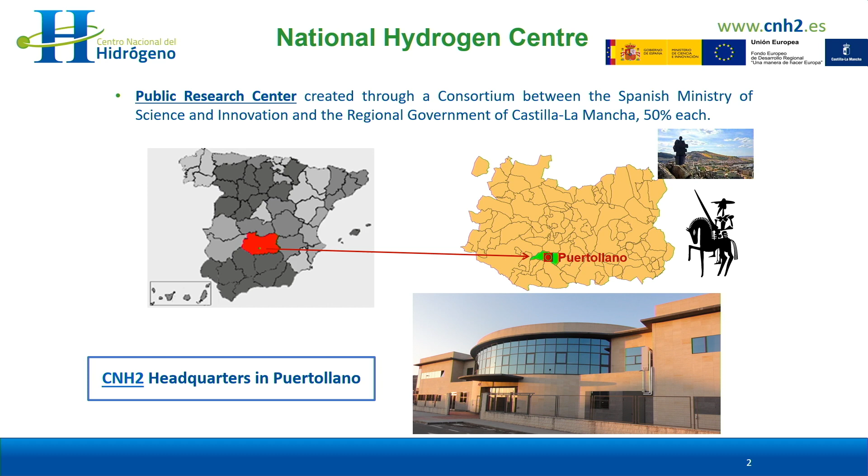Our headquarters are located in Puertollano, which is a city south of Madrid, like an hour by train. And Puertollano has a really important industrial history, and it is now becoming a core for the hydrogen world.

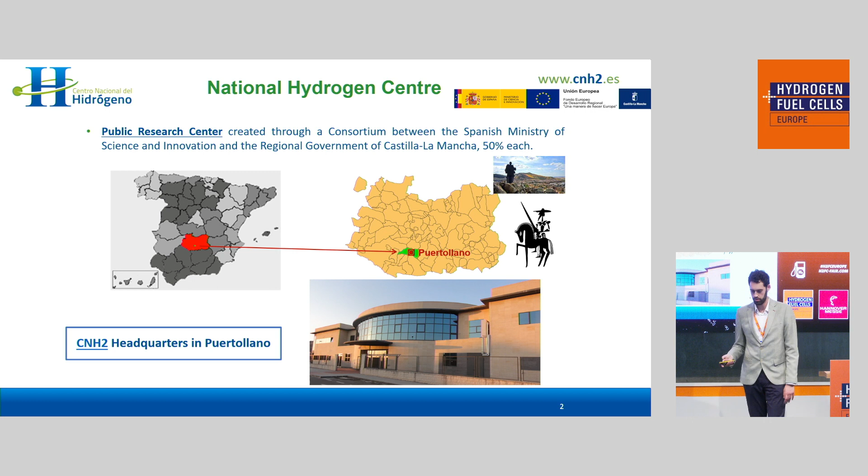We, as a research and development center, are focused on the development of hydrogen technologies, and our main objectives are the promotion and encouragement of hydrogen technologies, such as fuel cells. We perform research, experimentation, and validation of different prototypes and equipment. We can develop and scale different processes.

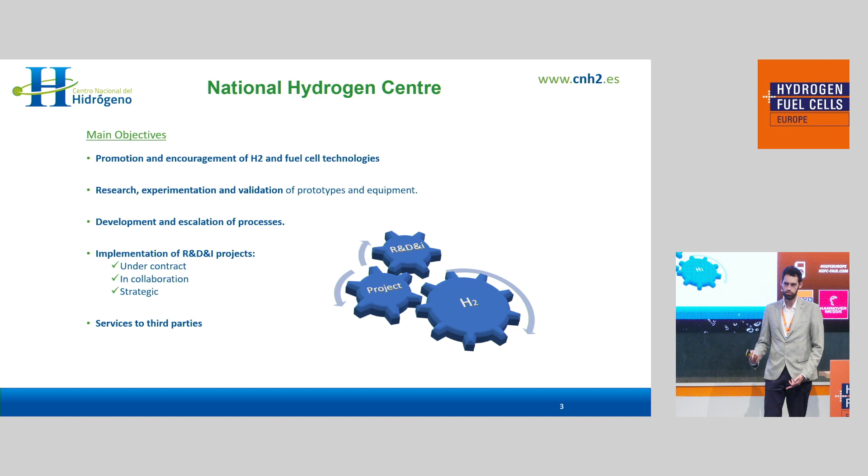And our way of working in research and development projects could be under contract with private or public funding, in collaboration with other companies, national or international, and strategic projects, meaning projects financed by our own resources. We can also provide services to third parties, such as training, consulting, engineering, testing, etc.

I want to talk a little bit about our main lines of work. About hydrogen production, we are focused on electrolysis technologies, specifically PEM, alkaline, and solid oxide, but we also have laboratories for biotechnologies. About the use of hydrogen, in fuel cells, we do all the stages: the design, optimization, manufacturing, assembly and testing. We have a microgrid laboratory for the integration of hydrogen with different types of energy.

In transport, we have experience with forklifts, bicycles, and especially medium and heavy duty vehicles. And of course, with hydrogen refueling stations and domestic hydrogen refueling points. In industry, we can talk about the use of reformers. Recently, we have a project about the construction of a biogas plant. And in buildings, we develop micro combined heat and power for domestic hot water or heating, for example.

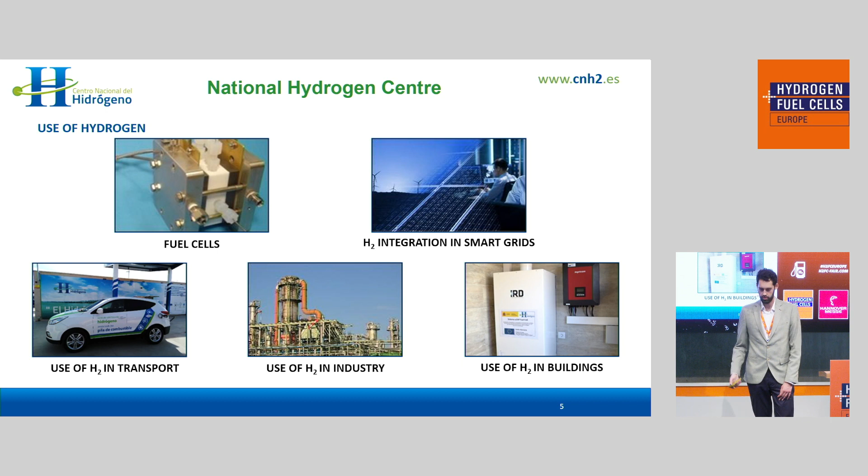We can test materials, coating materials in contact with hydrogen, hydrogen embrittlement. We are talking about blending simulation or the development of test benches for mixes, hydrogen purification, hydrogen storage in the form of compressed hydrogen. Also, we expect to have a liquid hydrogen laboratory really soon. And power to X in different forms, such as power to ammonia or power to gas.

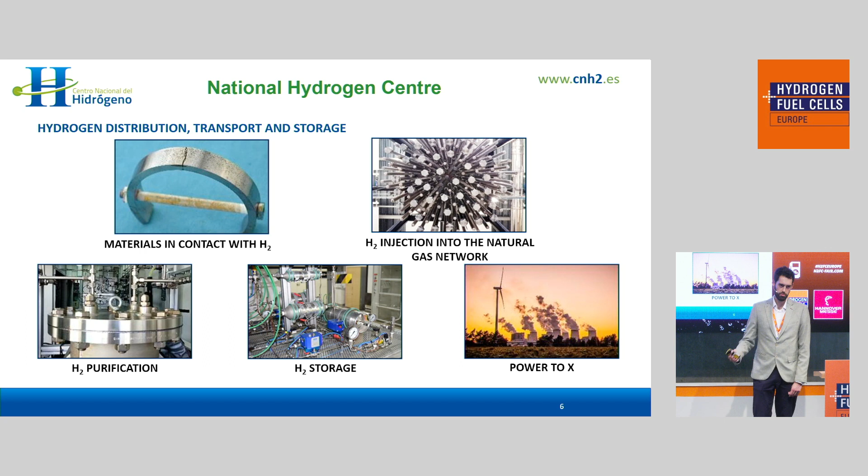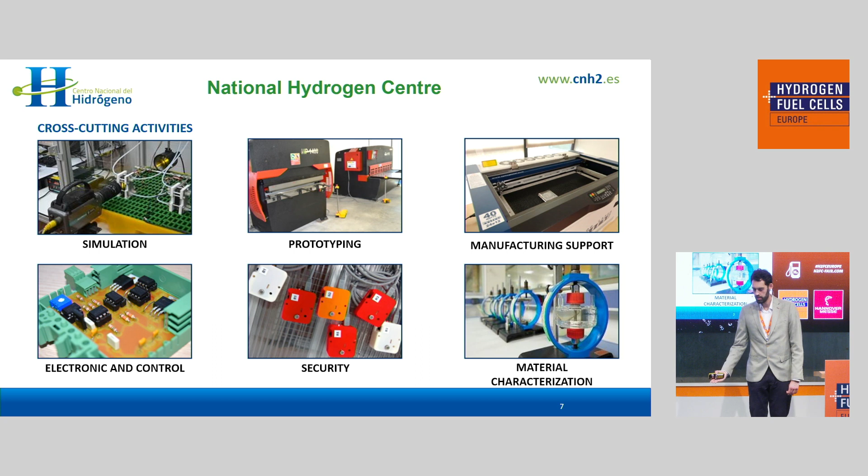And the activities that support all our lines of work could be simulation, prototyping, manufacturing support. We can develop our own control system and adapt it to the different needs, explosive atmospheres studies, material characterization, etc. As you can see, we can cover all the stages of the hydrogen value chain, from production, storage, the transformation, with our own balance of plant or with the final balance of plant, and the end use.

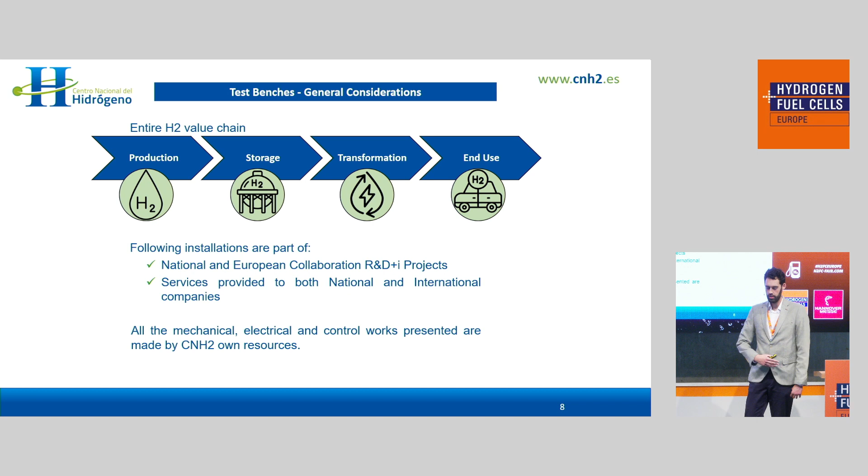In each and every one of these stages, we can carry out all the necessary tests, and that is what I would like to show you briefly here. All the installations that you are going to see are part of national or European collaboration projects, and also part of services provided to both national and international companies. And of course, all the mechanical, electrical, and control works are made by us, such as designing, calculation, drawings, connections, integration, etc.

We are going to cover the whole chain step by step, starting with the production of hydrogen. Here we have an alkaline electrolysis test bench. This one allows us to test powers up to 2 kilowatts and 35 bar, and it includes the cooling system.

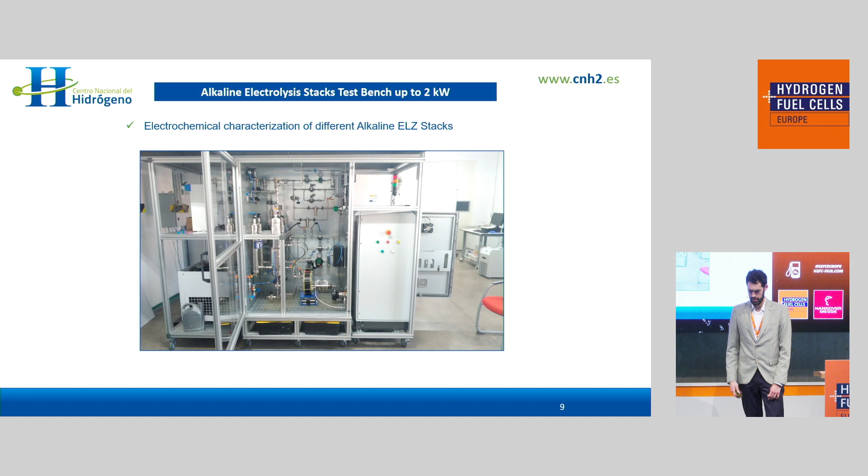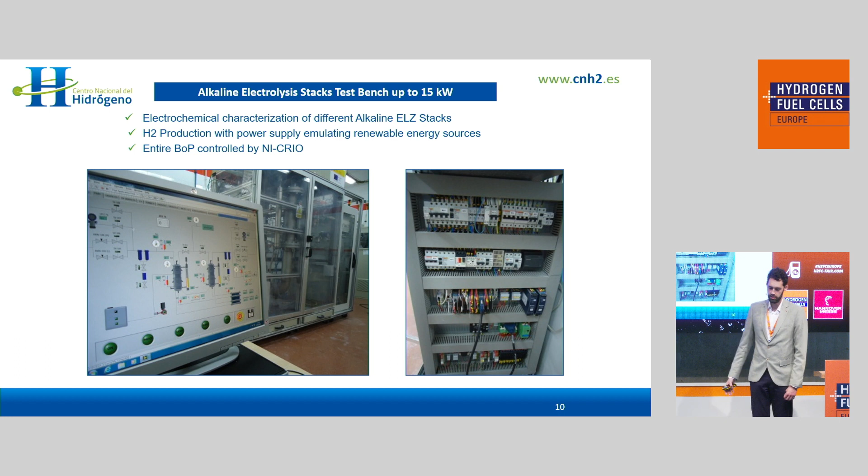This one is also alkaline, but allows us to test up to 15 kilowatts. This is one of the first that we built. And here we simulate a power supply from renewable energy sources. And in this case, the entire bench is controlled by CompactRIO systems.

About solid oxide, we have this project. We are trying to start a semi-industrial production line of solid oxide systems, both electrolyzers and fuel cells, of course. And we do all the stages from designing, optimization, manufacturing, and assembly, and of course the testing. In this case, we are testing up to 2 kilowatts.

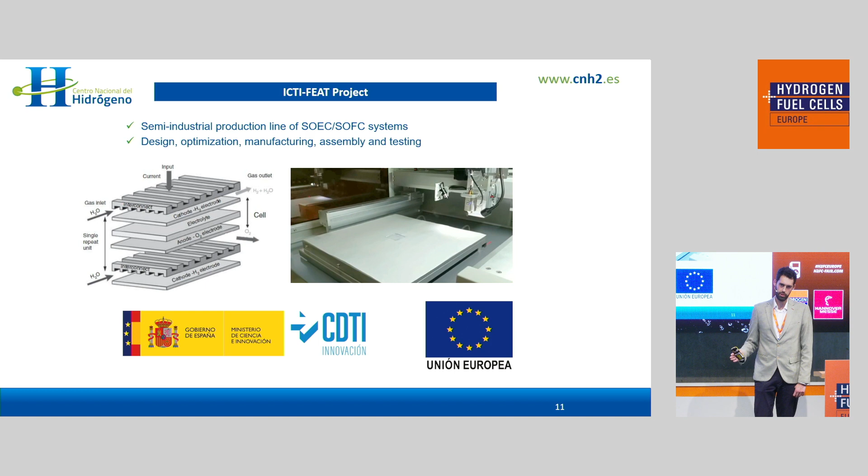About fuel cells, all the fuel cells that we have are PEM in this case. In this photo, you can see two test benches. On the left side, there is a test bench between 1 and 10 kilowatts, and on the right side, between 10 and 30 kilowatts. In this case, we can test stacks directly, and we have a great versatility because we can modify our configuration so it can adapt to the different needs.

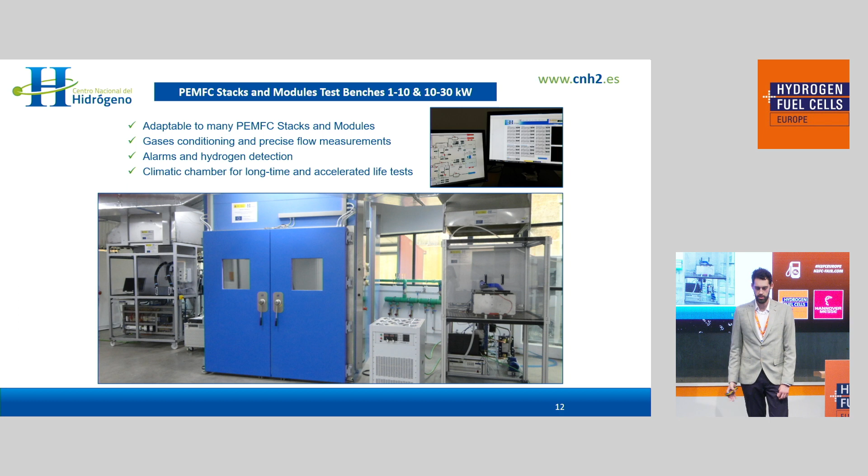In the middle of the photo, the structure with the blue doors, this is a climatic chamber that we use to test the behavior of our system under extreme conditions of temperature and humidity. So we can see the aging of our stacks.

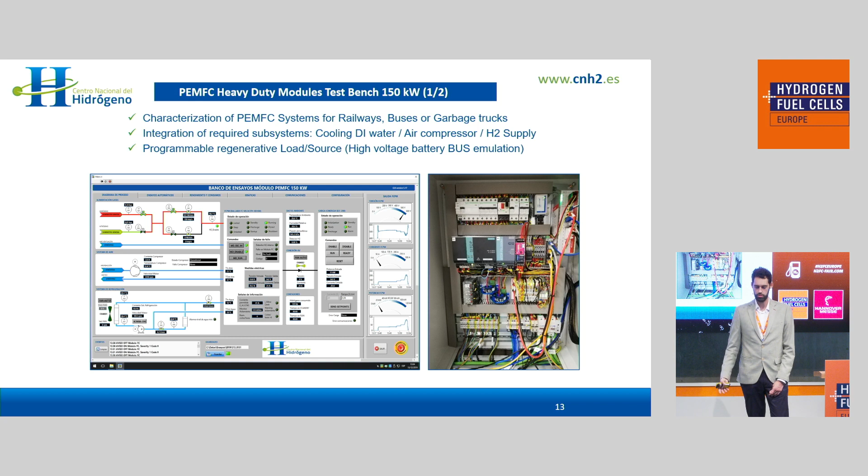We have a European project called FCH2 Rail. Here we are testing a fuel cell power pack that consists of 3 fuel cells of 70 kilowatts each. And here we test it together with the batteries and the AC-DC converter. These tests are not only for the fuel cell, but also for the hybridization of the system. And that means we can test how the system behaves when the batteries and the fuel cells are working simultaneously.

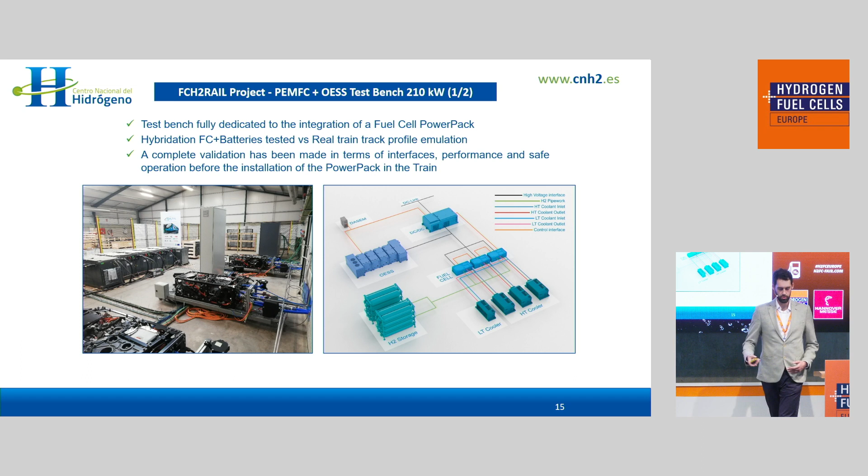This one is a test bench for a final use. We are developing prototypes of gensets for Nedstack fuel cells. They are an alternative to the diesel combustion gensets already in the market. And we have alternatives with AC, with DC. There have been several models developed.

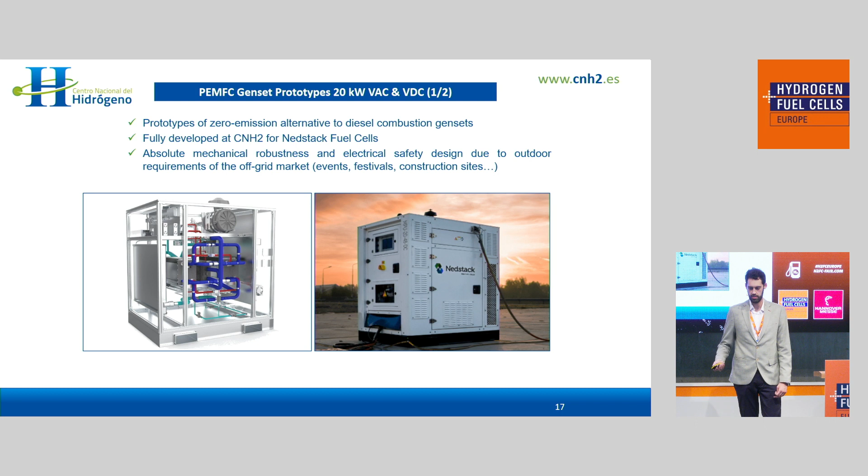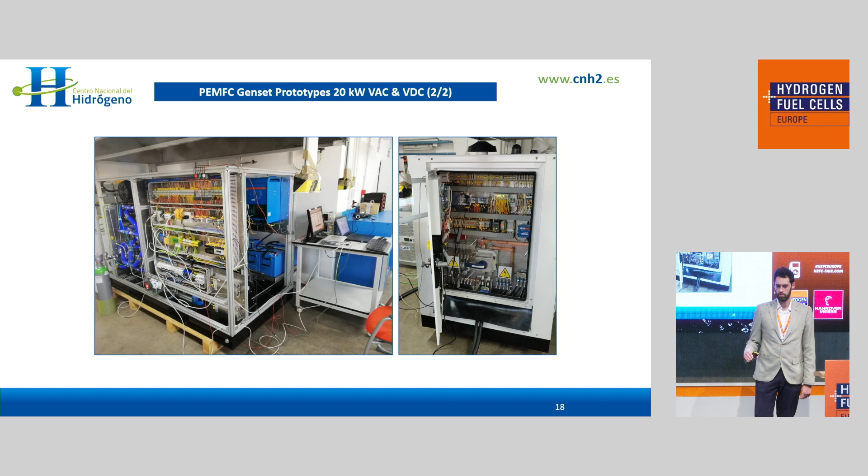In this case, it has a superior level of robustness above a prototype, because this one is a system that the company Nedstack is going to show in fairs, in events, etc. So these are photos of the different test benches that we are developing. And in this case, the genset goes up to 20 kilowatts.

And finally, we have the H2 logging project, where we have two parts. The first one is the retrofitting of a forklift with a 1.5 kilowatt fuel cell. And the second one is a development of a hydrogen range extender for a medium-duty vehicle. And in this case, the fuel cell has a power of 16 kilowatts, and all the different tests have been carried out, both outside of the vehicle, and of course in the vehicle, and the vehicle in our roller bench.

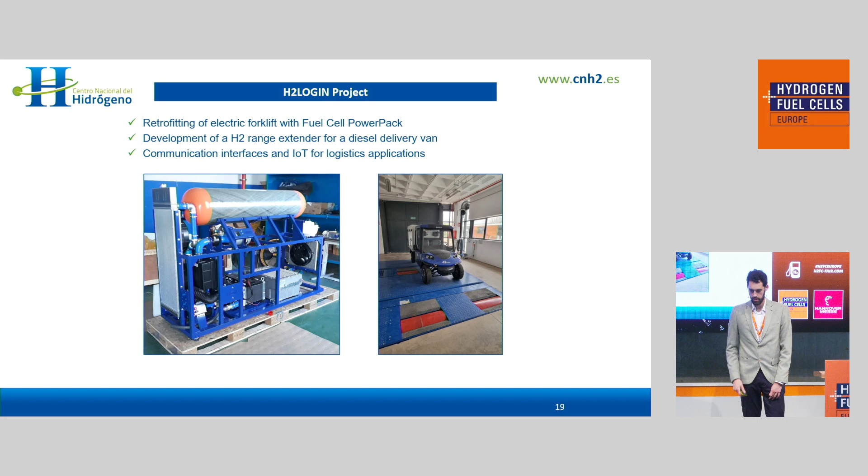Yeah, this is what I had to show you, and I think this is how we can help. So if you have any kind of questions, I'm open.